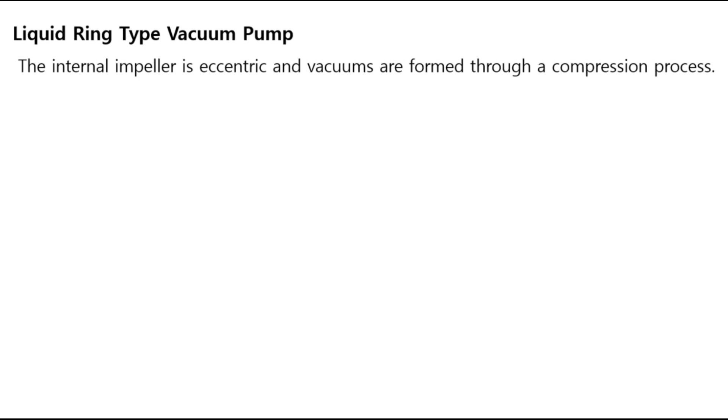Unlike dry screw, there are many auxiliary facilities. Let me explain the processes and devices first. First, there is a vacuum inlet and a liquid inlet that supplies water. It is inhaled at the same time, and it goes through a compression process. The used water is discharged into the water tank with the gas. The gas is exhausted and the water is cooled and reused through a heat exchanger.

There is no need for a heat exchanger. If there is no heat exchanger, the pump efficiency is better. However, a lot of water use increases the cost. If you have a heat exchanger, you need an inlet pipe that replenishes water as it evaporates.

The manufacturer usually puts the water tank in the size to store the amount of discharge for about 3 minutes. The height is higher than the water inlet, allowing it to be inhaled again. The heat exchanger is designed to be about 1 square meter for 100 cubic meters per hour.

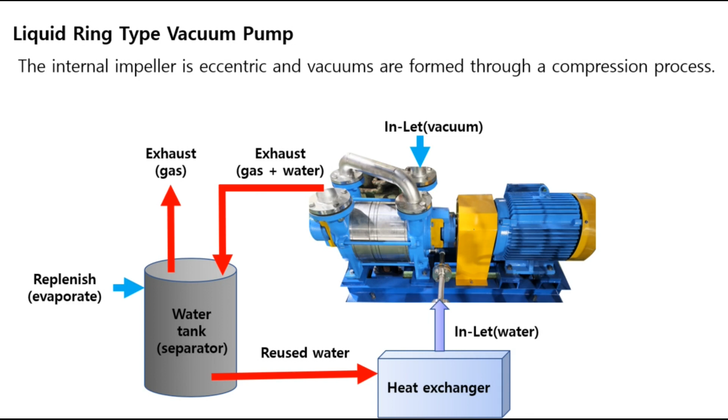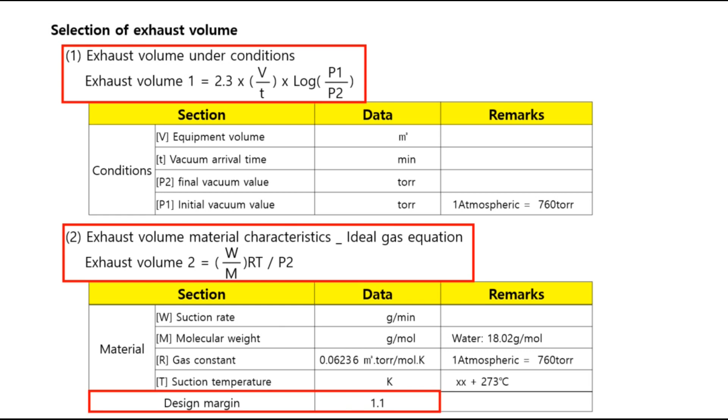Liquid ring type exhaust selection is special, so listen carefully. As shown in the table, the exhaust was calculated from the vacuum pump first round. The exhaust was 1.1 times the design margin of the sum of the condition value and the material characteristics value. The dry screw applies the exhaust as is. However, there are important things to consider in the liquid ring type.

For example, when the water temperature to be used is 20 degrees, and the required exhaust is 400 cubic meters per hour based on 30 torr, how much should the vacuum pump exhaust be? The most important thing in the liquid ring type is the water temperature. Let's look at the exhaust graph according to the water temperature and vacuum.

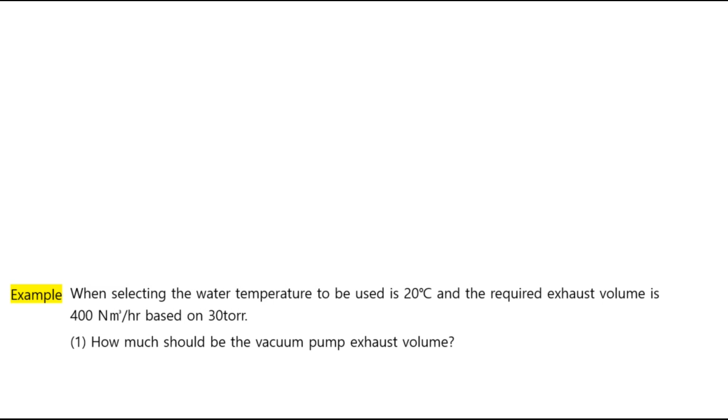Check the temperature curve of 20 degrees and check the vacuum level in use. There is a point where the water temperature curve and vacuum degree meet. The value of this point is 0.78, which is the maximum exhaust efficiency. If you calculate it, you can see that a pump of 512 cubic meters per hour capacity is required by dividing the required exhaust of 400 by 0.78.

Second, the usage conditions have changed, so how much exhaust is possible if I use 50 torr? The water temperature is the same, and the maximum exhaust efficiency is 0.9 if you check the vacuum level of 50 torr. So if you multiply 512 times 0.9, you can exhaust 460 cubic meters per hour. Did you know that the capacity of the pump depends on the temperature of the water?

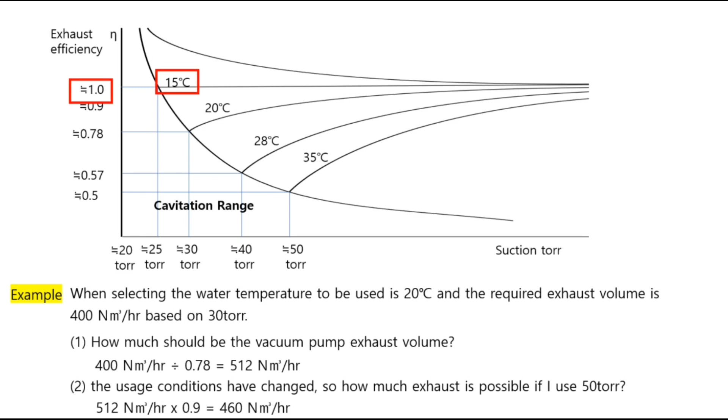And the point where the efficiency is 1 is 15 degrees. The lower the temperature, the better. But if vacuum below 25 torr is required, I recommend using a combination of boosters. When selecting a pump, ask how the manufacturer designed the exhaust based on the graph. In my experience, there was a manufacturer that selected a pump without knowing this, so I remember telling them.

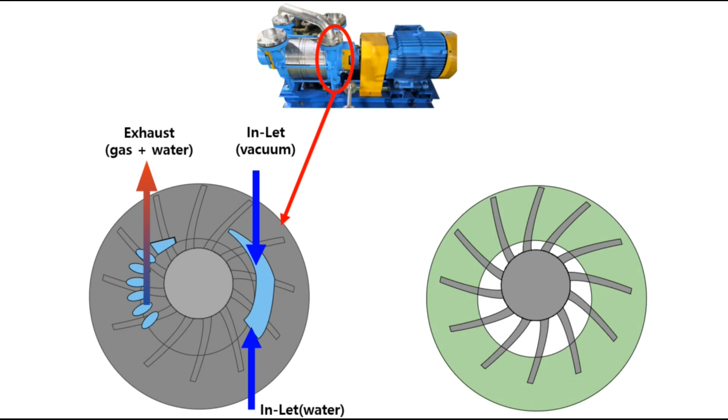Now I'm going to look at the inside section and explain the principle. The picture shows the entrance to the inner casing. The upper part is gas inhaled, and the lower part is water inhaled. On the left is the principle of exhaust. If you look inside, you see an eccentric impeller, which is a compression structure. It rotates clockwise and inhales, and the space is gradually reduced and compressed.

The liquid compresses the gas molecules. At this time, the generated heat and the frictional heat of the impeller are exhausted. When exhausted, the water temperature rises by 3 to 5 degrees. To reuse this water, install a heat exchanger. Pump management is fine as long as there is no cavitation sound. Please refer to the video above for the sound of the cavitation.

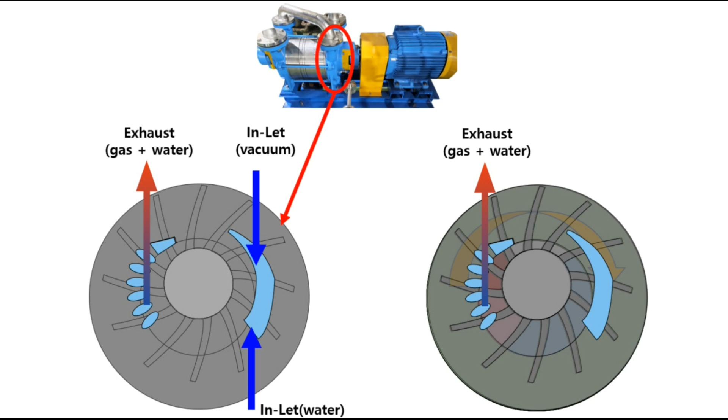The water sealing method has many auxiliary facilities, but it is useful for processes with sticking or corrosion, like a chemical factory. I think liquid ring type is difficult, but please take your time to organize the contents. There may be parts of the content that conflict with expert opinions, but I'm sure this will help you.